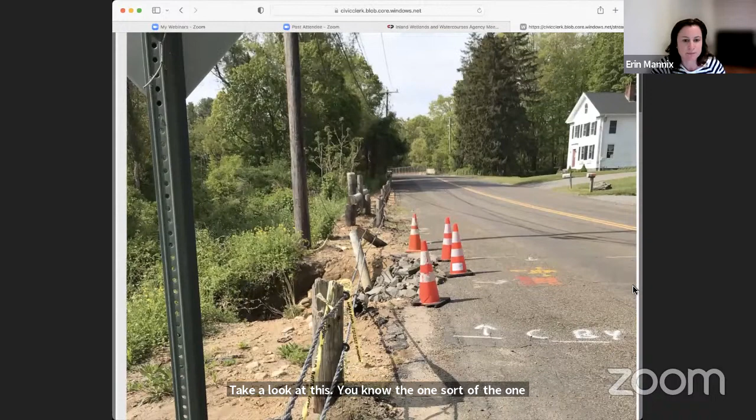Right. So you can see there, and like Erin said, we just want to get this repaired as quickly as possible. At this point, it's a bit of a road hazard, and we intend to do this with our own forces, with the Public Works Department. We've done work like this before, but I wanted to go to Erin and make sure that we're following the proper requirements. So Erin came up with this idea that would help expedite the work.

Basically, you can see in that photograph where water runs down the road, and it's probably formed a bit of a windrow along the edge and has gotten concentrated in places, which we can fix as part of this work, and let it run off as it did in the past, as sheet flow, so it doesn't concentrate in the road. But this was after a bad storm. It started eroding and only got worse in subsequent storms, I think.

And so you can see this is looking at the top of the culvert. Actually, can you show the other picture? Yeah, maybe if you can show the pipe outlet, from down in the embankment looking up. Oh, they're all on the same screen. Silly me. I'm sorry, I was looking for the second file. Here we go.

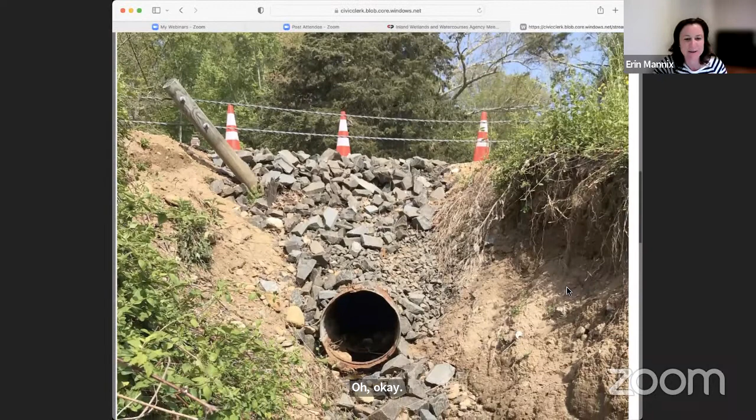Right, so this is down at the bottom of the channel. There was another 15-foot or 16-foot length of pipe section on the end of that. And after this erosion occurred, the pipe basically just collapsed down the embankment, and we hauled that out of the channel, and it's up on the upland area and the shoulder. So what we want to do is replace that pipe.

Well, let me back up. The plan here is to put a hay bale check dam type of thing, or silt fence and/or hay bales, down at the outlet of the new section of pipe that we're going to be putting in, so that if there is any wet weather, it'll trap any sedimentation that comes through. The plan is to do this work when it's dry. But definitely as a precaution, we'll put a hay bale check dam at the outlet,

and replace the fill material that has washed away and the pipe section, basically putting the outlet back where it was. And actually, this pipe is an old corrugated metal pipe that has eroded. The invert of the pipe is rusted out and needs to be replaced. So the plan here is not only to replace the end section that fell, but the entire pipe all the way back to the catch basin on the other side of the road.

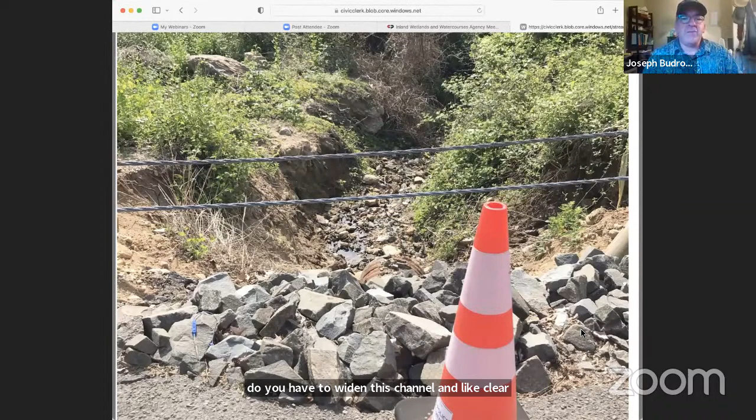Now, before you put in your fill and your stone, John, do you have to widen this channel and like clear out some of the vegetation and make it kind of sculpted before you infill? I don't anticipate it, possibly moving the riprap out of there that's fallen down. I think we'll do that so that we can dig in gravel material.

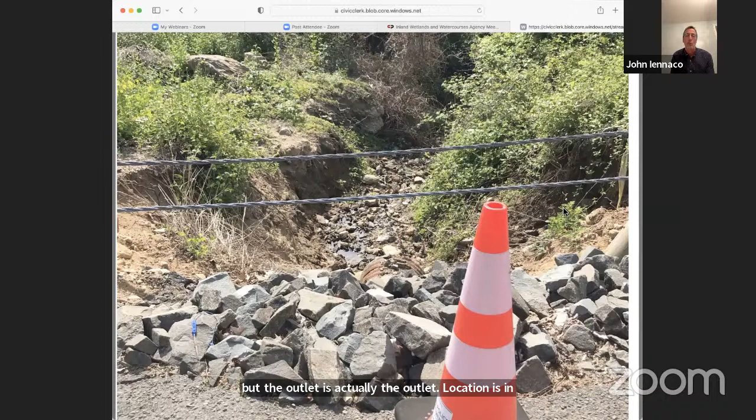But the outlet location is in the middle of that channel that you see in the background. Mhm. So it's pretty wide. There's enough room to work in there. So I wouldn't want to touch the embankment here. I don't think we have to. We actually shot the inverts of the pipe. We know exactly where it was.

And the plan is to put the pipe outlet back where it was at the same elevations, and really not change anything. But like I said, before that pipe section that had collapsed was removed, we got a good location of it. You can see sort of the dark area of the soil on the left side of the photograph. That's about where the pipe outlet was, centered in that channel.

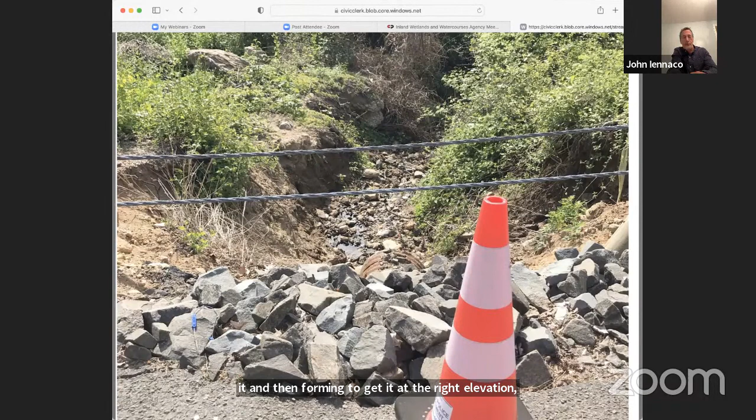So there's room to work without significant excavation, just probably cleaning it and then forming to get it at the right elevation, bringing in enough material to put the pipe back at the same elevation. But actually it's not that much material. It's like 4 or 6 inches of material below the pipe to put it back at the elevation.

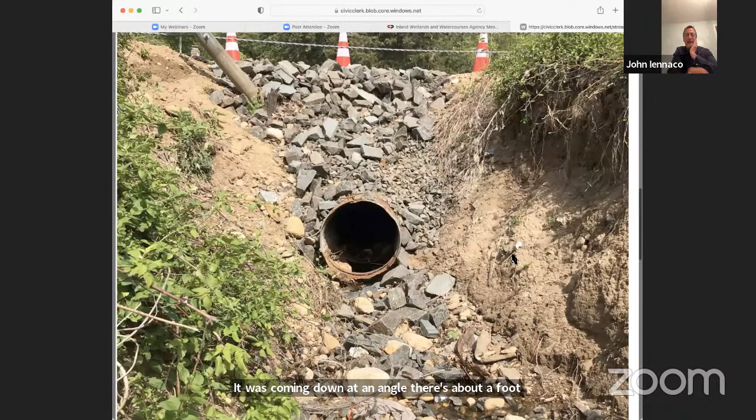If you look at the other photograph, sitting in the bottom looking up, it kind of looks like the pipe is way up in the air, but it really isn't. It was coming down at an angle. There's about a foot of drop from the inlet side to that side. And it's kind of deceiving in that picture.

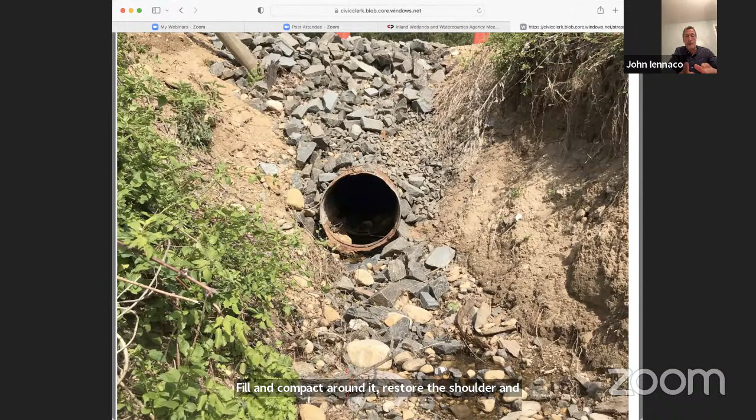The end of the new pipe is only about a foot above this stone material that you can see in the photograph. Not a foot, more like 6 inches. So not a lot of material. We'll form a bedding, put the pipe in, and then backfill and compact around it. Restore the shoulder and place riprap for some width over the top of the pipe to make sure that it's stable.

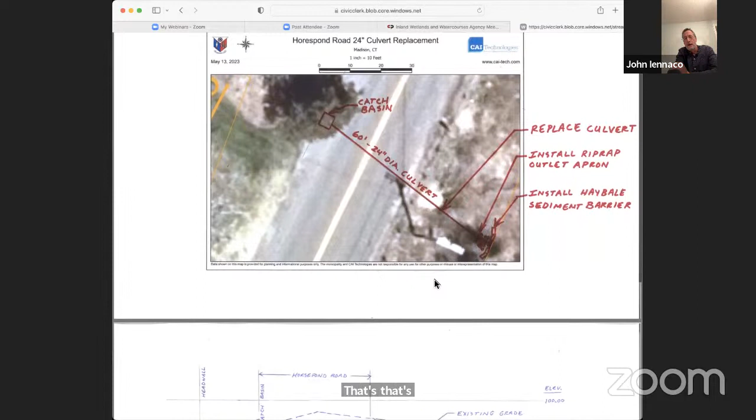We did measure everything. The profile is what we intend to do. The dashed line is what the grade looks like now. It's distorted scale, but it's to scale, just distorted. The plan is to extend that pipe. What you're looking at here is the final length of pipe where it extends beyond the embankment. And you can see that little triangular piece is the fill that's going back in the void.

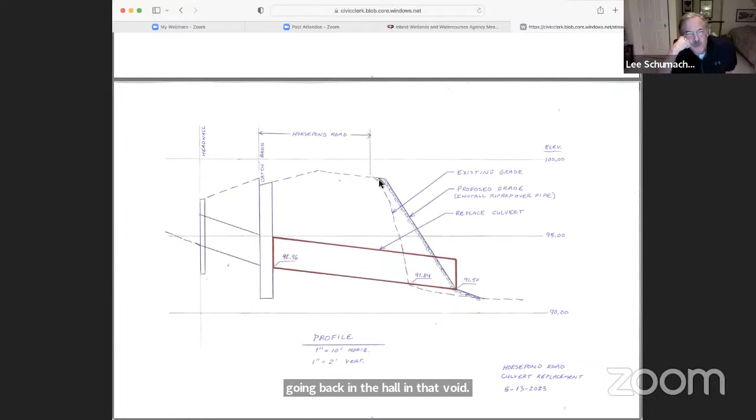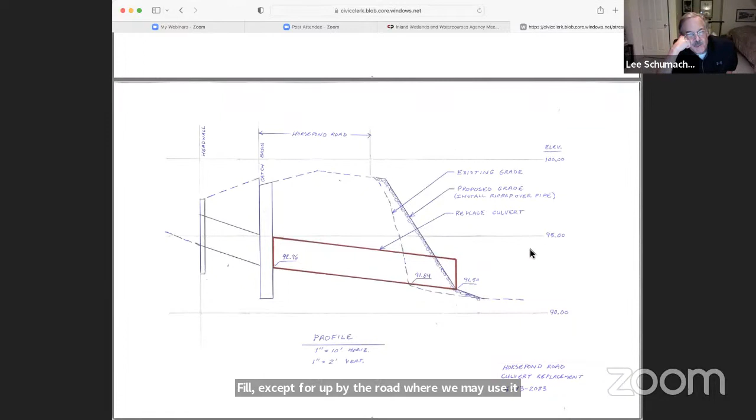This area, that's all gonna be riprap, John, I guess, right? Correct. Well, on top. That area is fill. That'll just be common fill, except for up by the road. Okay, all right, I got it. Yep. So part of the downstream end of the pipe's gonna be exposed according to this, it looks like. Yes. Okay. Right.

John, didn't you say at the site walk you were going to extend 15 feet outward with pipe? From where it was cut off? Yes. So the dashed line, and there's an invert elevation there. That's the pipe that you see in the photograph. I haven't really shown this as the sections of pipe. That's the full length. So from the dashed line, where I can't read the invert number there.

91.84. That's where the existing pipe is. The other number to the right is the elevation of where the new or final outlet end will be. And that's where the old one was. That fell off and we hauled it away. That was 15 feet. Yes, it was like 15 or 16 feet. Mhm.

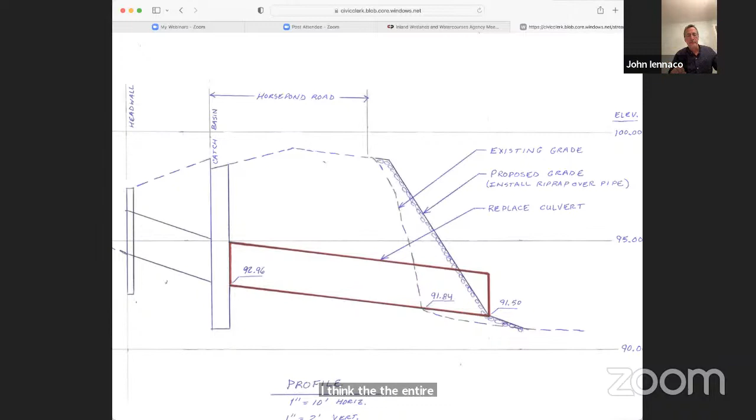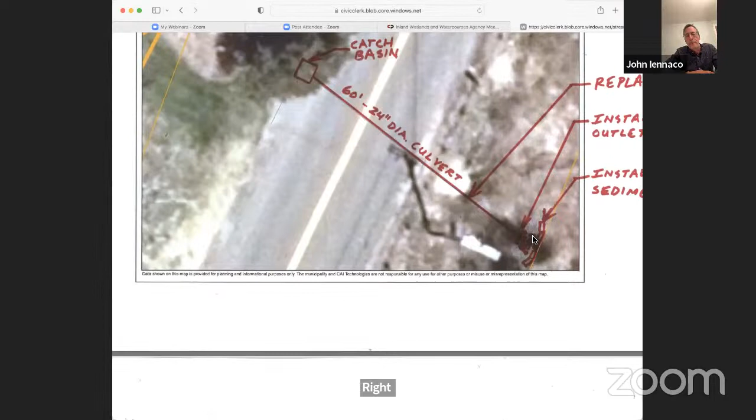I think the entire length is 60 feet from the catch basin to the outlet here. 60 feet of 24-inch diameter. Right. And you'll have some stone at the outlet here. Correct. Yeah, we'll have an energy dissipator there.

We'll form a riprap apron at the end, which is pretty much what you had before, although actually it's kind of hard to see now. I'm not sure if that was a decent riprap outlet, but that's the plan. There's room within the right of way to construct that, to dissipate the flow.

And John, remind me what you're gonna do on Horsepond Road so it doesn't happen again? So I think part of the issue here was along where that guide rail is, where you can see the guide rail in the photo. It's formed sort of a lip along the edge, and I think water traveled down the gutter further than it did probably in the past. And we can knock that down.

We can clean up the shoulder and knock that, we call it a windrow, but basically a lip along the edge. So that water will flow off as more like sheet flow and won't concentrate, to provide some assurances that it's not going to erode again. Yeah, that's something we'll keep an eye on and watch, and if we need to do something in there, we will. The other thing that has to happen in here is the guide rail needs to be replaced where it's fallen down. All right.

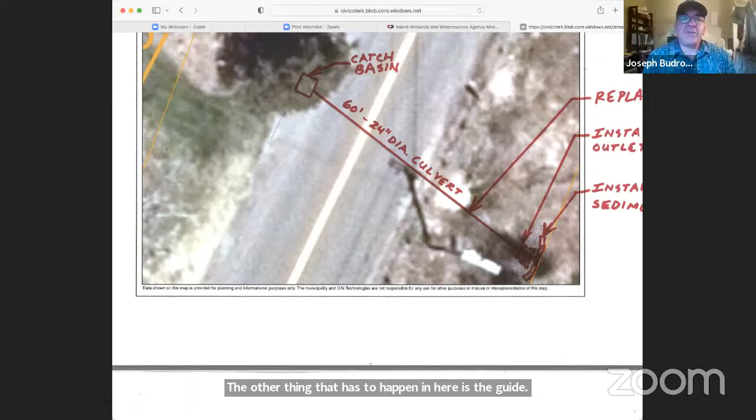Now, being a show cause hearing, Aaron, there's no need to make a motion, correct? Well, basically if the agency agrees with the order, you can uphold that order, you can amend it and give us a corrective action order. Or we could put a time frame that this be done. We clearly know that the town is looking to do this as soon as possible. And it is starting to dry out more than it was earlier this spring, so it's a better time.

I have a question. I'm curious why we wouldn't just install a catch basin on that side of the road to avoid the overland flow altogether? There's quite a length of uncurbed roadway there. Most of Horsepond Road is not curbed, so I don't think we want to change the flow regimes in there and take water that runs off in areas of sheet flow and concentrate that all into a catch basin and run it into the channel. I thought about that, actually, but I think it's better off to put it back where it was.

I'd rather not change things, redirect flow around. Generally my opinion is you want to avoid that as much as possible. Seems like it wants to go here, though. This is the low spot over that pipe. I don't know if that's a low point in the road, if that's a sag in the road, actually. It's a good question. I don't know if that is. It probably is. Because that's where it's going to happen again at some point, you know?

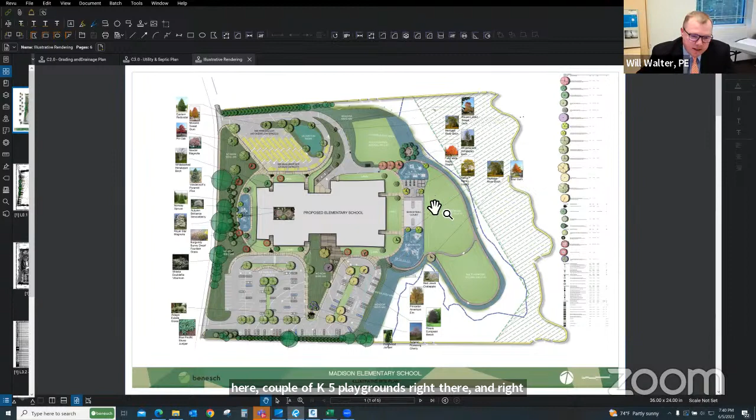So as far as placemaking spaces, we have some outdoor spaces down here. We have 3 playgrounds, a pre-K playground up front, up here, a couple of K5 playgrounds right there and right there. And they sandwich a basketball court with some other hardscape areas for Foursquare and things like that. We have down here in the floodplains, which I'll talk about in a little bit, a couple of multi-purpose natural grass fields.

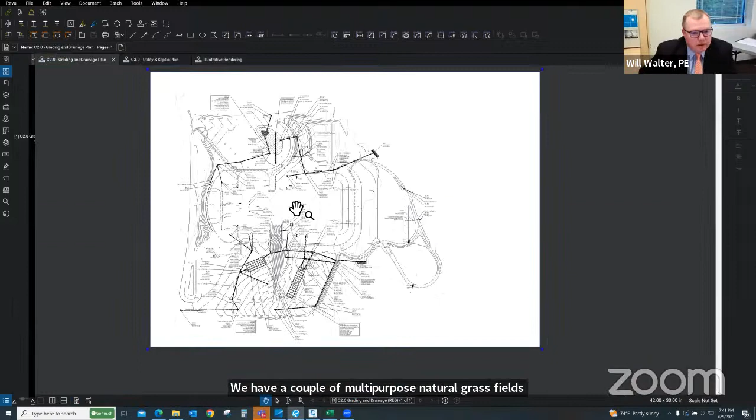So moving on to the stormwater design. Excuse me, I'm battling some allergies here.

The green is the wetlands. The cyan, which is the hatched cyan area, is the upland review area, which is about 2.3 acres of disturbance in the upland review area. The red here is the 500-year floodplain. So there's a lot going on this site, and when you're out at the site, it looks like you have a lot of land to work with. And while you do, there's so much going on that, I want to say it's been a challenge, but it's a challenge in every project to fit the program in and meet all the regulatory requirements.

So the first thing, obviously, is the green line is the wetlands. We've worked very hard to keep completely out of the wetlands. We're not disturbing 1 square foot of wetlands. This floodplain line right here follows the contour, and keep in mind, we've done all this design in coordination with the town engineer.

But in this 500-year floodplain, not only do we have to have 0 total fill to the east of this red line down here, but we have to have 0 fill per each foot of elevation rise as we start from the wetlands. Each foot we go up. So it's not a matter of just 0 compensatory total, it's every foot. And we have to keep that finished floor elevation at 2 feet above the 500-year floodplain.

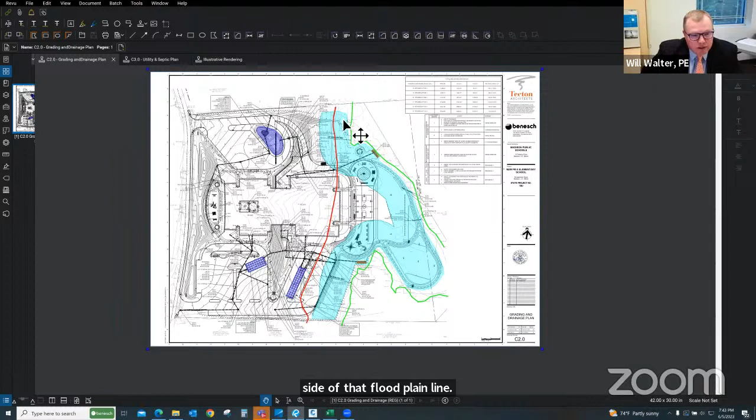So if you can imagine, here's the building line right here. It's on the east side, on the floodplain side of that floodplain line. So we have to do some filling in here. So we've really had to work very hard to grade this so that we were not filling in the floodplain. And then also, having put one of the multi-use fields right here, we want to raise that up as much as possible so the kids aren't playing in a swamp. So there's a lot of things going on that we've had to work really hard to do.

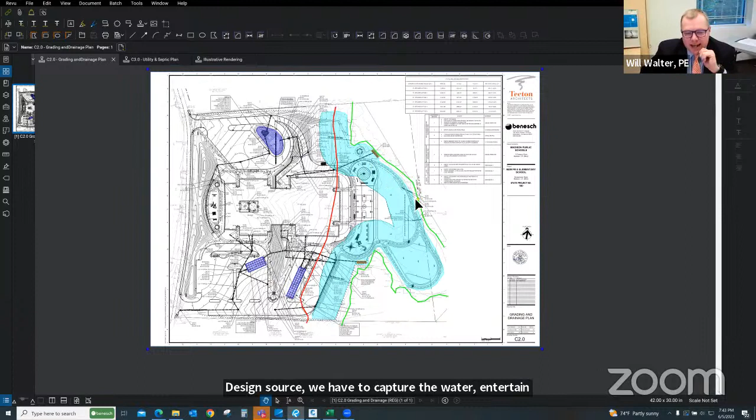But there's really 3 goals with the stormwater design. One is whatever is naturally flowing down over the grasslands right now into the wetlands, whatever the peak flows are through the design storms, we have to capture the water and detain it and regulate it and then discharge it at a lower peak rate for the 2, 10, 25, and 100-year design storms. We're doing that by capturing the flow in all of these impervious areas, including the roof, and we're discharging it to 3 stormwater management areas.

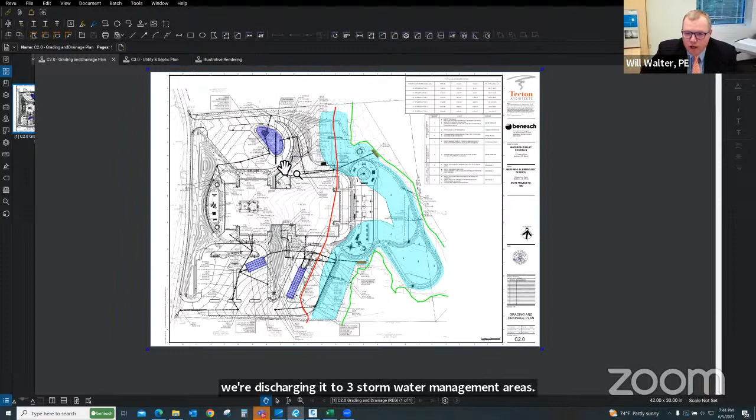The first one is on the north side. It's an above ground basin, which we always prefer to go above ground when we can. And we had the ability to do it over here. And the above ground basin is basically going to be a depression that's in the middle of the grass island, around the parking and the drive aisle.

On the south side, we just simply didn't have the topography or the room to go above ground. So we've gone with 2 underground detention systems, and you can see I've highlighted them here in blue. I believe they're 4.5 or 5 foot half moon chambers that are open so that the stormwater flows in. They're sitting on about a foot of stone. The water comes in and it percolates in the ground, which is fantastic because the first flush is treated by discharging back to the ground.

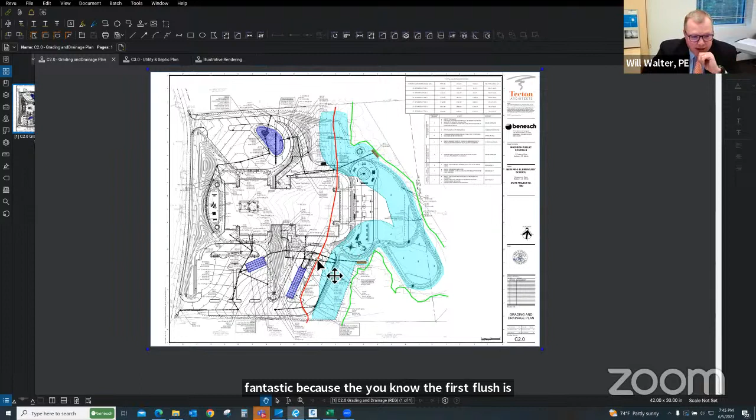And then for the smaller storms, the majority of the flows are going to be infiltrating to the ground. And for the larger storms, as they perk up through that stone, as they bubble up through that chamber, we have overflow pipes, which then discharge the flow to two areas. And we've designed this specifically in coordination with the town engineer.

So the flow comes out of here and it comes down to one of these two, what we call overflow level spreaders. There's one right here and there's another one down here. So the water comes in, and these things are basically a concrete chamber where the pipe comes in. It's a concrete trench. The pipe comes in, it tees to a perforated horizontal 24-inch pipe that's surrounded by stone in the trench. The water then bubbles up and sheet flows over the concrete and riprap level spreader.

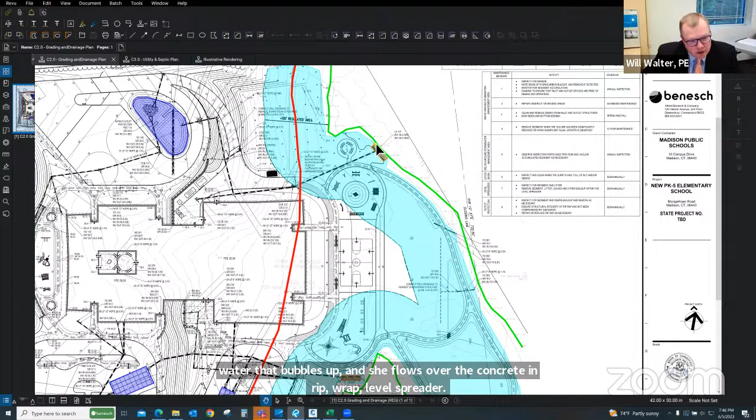So instead of point discharging to the wetlands, it sheet flows. You can see it's sheet flowing like this over here, and it's doing the same thing, sheet flowing over here. That's a design I've used many times. It's a really good design, and the town engineer really liked it. So that's how we're regulating the discharge to the wetlands that eventually gets down to the Neck River and not causing washout.

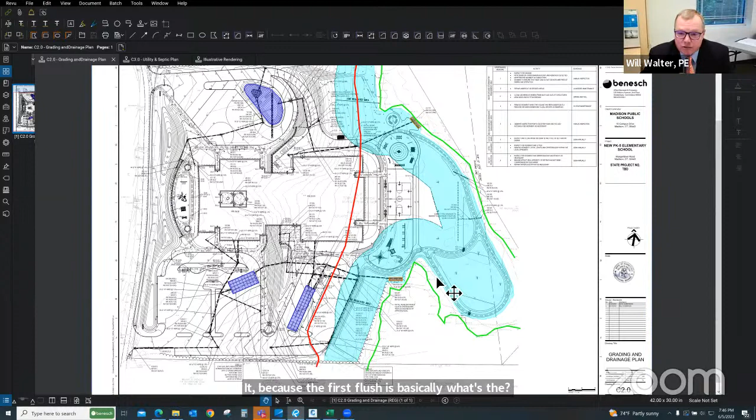The other goal of the stormwater management system is to take that first flush and to treat it, because the first flush is basically the first inch of rainfall. The pollutants you find on the paved surfaces are a result of car exhaust, the heavy metals coming out of the exhaust, occasionally oil drippings, things like that. And the thought in the regulations that DEP has put forth, that we all adhere to and design to, is that first inch of rainfall is what carries away the sediment that's holding on to these pollutants.

And so what we've done is, as we capture it, we come into what's called a sediment forebay that basically treats that, and then it spills over and gets into the larger part of the detention. And from there it spills out and goes to the wetland. And then these underground systems are designed with what's called an isolator row that's really performing that same function as a sediment forebay. And so we've designed the water quality to meet the DEP requirements.

I just got an email today from the town engineer on his review of the stormwater management system, and he had a couple of very, very minor comments, which we will certainly address. But basically, it looked like he had accepted our design part and parcel. So that's the other part of the stormwater design.

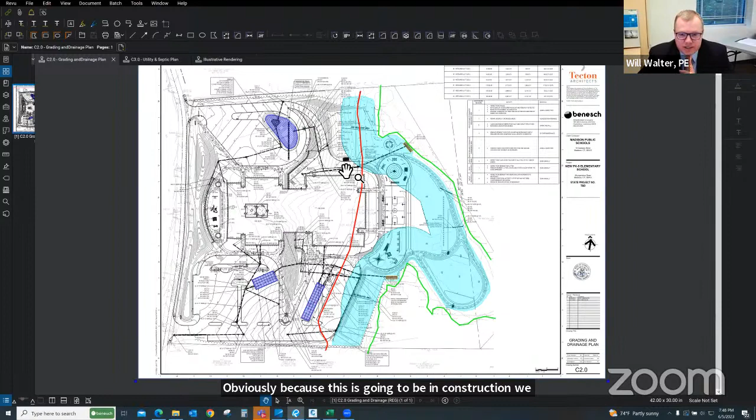The third part is, I'm not showing it here, but it's defined in our erosion control plans, that we've provided a very comprehensive erosion control design so that during construction, we're going to make sure that all the stormwater is treated, because it's going to be muddy, obviously, during construction. We have things like construction entrances, temporary sediment traps, silt fence, hay bales, temporary washout areas, things of that nature. So the sediment controls have been designed per the 2000 DEP erosion control manual. I'm not showing it here, but that is a part of the plan set.

And the last thing that I would like to talk about before I turn it over to George Logan, and he'll talk about his inventory of the wetlands and his review of our stormwater design, which we did in concert with George as well, and then his opinion of the impact on the functions and values of the wetlands. The last thing I want to talk about is the utilities on the site.

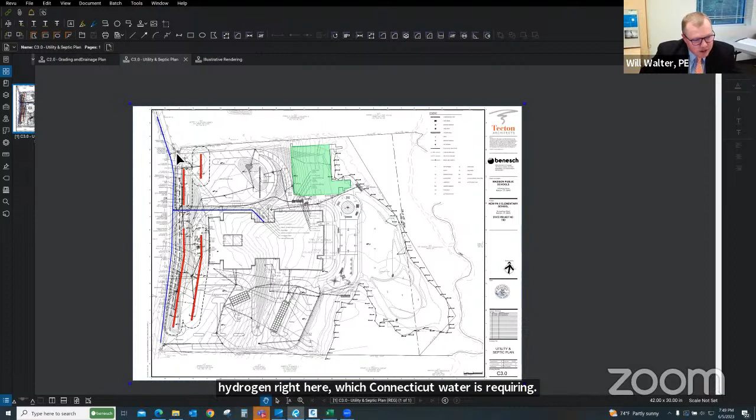So currently there is no public water. We're extending the public main about half a mile up from Green Hill Road, which is way up this way. There's going to be a 12-inch water main extension that runs all the way down like this. We're taking it past here actually because the fire marshal is requiring us to put a fire hydrant right here, which Connecticut Water is requiring be right off their main. So there's going to be a fire hydrant right here, a fire hydrant up here. We're bringing in a domestic and a fire protection lateral like this into the building.

There is no natural gas, but you can see I've highlighted in green. We're going to be providing a geothermal well field, which is fantastic. It's green, it's awesome.

So that's going to help power the facility right here. And then the last thing I want to talk about is the septic system. Typically, what you do with the septic system is you would put it down gradient of the facility. We could, I believe, by regulation, actually probably put that septic system down here in this open space, down close to the wetlands.

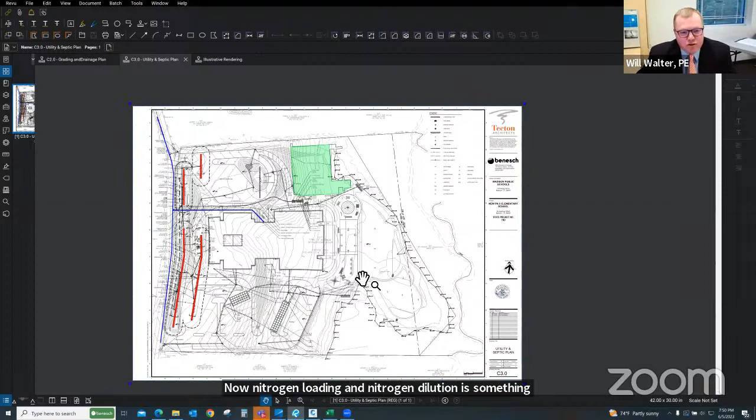But it was very important to the building committee that we designed it with consideration for nitrogen loading. Now, nitrogen loading and nitrogen dilution is something that DEP requires when you have a DEP system, and that's triggered when your total flow is 7,500 gallons or more. In this case, our total flow is somewhere around 7,200 gallons a day, which means that the reviewing authorities are the Madison Health Department and the Connecticut Department of Public Health. Connecticut DEP has no jurisdiction over this design.

But what we've done is, instead of putting it down here where I believe we could get it permitted by the local health department and by DPH, we are coming out and we are pumping it up this way. And I've laid this out. It's the red lines that you see. These are proprietary leaching systems that we're using, which are very, very effective at treating the septic. So we're going to pump it up, 3 separate pumps, 3 separate systems pumped into these red leaching units out here.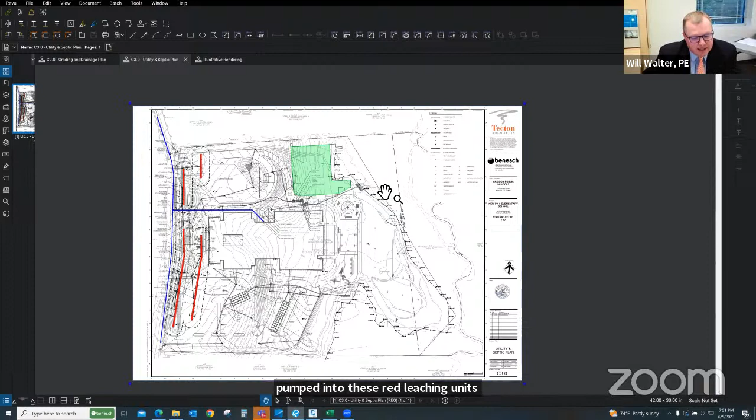These are located anywhere between 400 and 650 linear feet from the wetlands, and much further than that from the river. So the water is going to get pumped up here, then it's going to gravity into these leaching systems. It's going to percolate vertically down through the soils. We've done all the tests, and then it's going to slowly migrate underground, slowly down like this towards the wetlands.

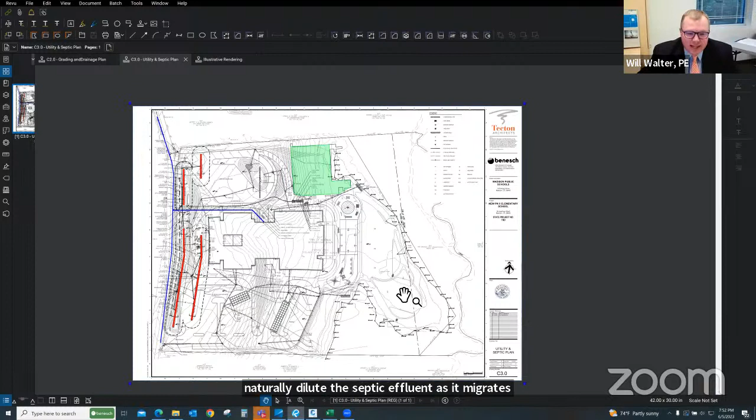We've also designed the stormwater system such that the stormwater, after it rains, is going to be in this system. We have some linear units here, here, and here, and elsewhere that are going to naturally dilute the septic effluent as it migrates down here to the wetlands. Now, keep in mind, none of this is required by Madison Public Health or the Department of Public Health. We're doing this just as an extra measure so that the Wetlands Commission and the Building Committee can feel great that this septic system is not going to impact the wetlands. And that's exactly what we've done.

So right now, the Madison Health Department has completed their review. The review has been ongoing by both the Madison Health Department and the Department of Public Health, but the Madison Health Department has completed their review, and now the Department of Public Health has had it for probably about a week and a half or 2 weeks. But they've been informed of this design the whole time. So I'm hoping to get comments back from them in the next 2 or 3 weeks. And then, of course, we'll respond to their comments as we need to.

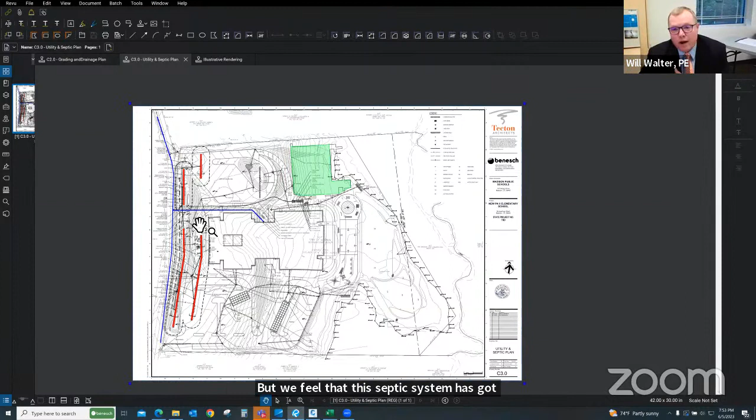But we feel that this septic system has gone significantly above and beyond what is required, again, by the local and state health departments. And so at this point, I'm going to stop sharing my screen, and I'm going to turn it over to George Logan, who's our soil scientist on the project.

Good evening, everyone. George Logan here for the record, professional wetland scientist, registered soil scientist, senior ecologist with the Ecological Society of America.

So one thing that I probably need to ask before I proceed is if I can share my screen. So if I can, sure. I guess. Yes. Well, okay. So here we are. I don't know if you folks can see. Hold on a second here. Maybe, okay. I got a lot of overlapping things here, so I need to figure, all right. Can you see that? Yes, affirmative? Yes, perfect. Okay, great. All right.

So I'll try to go, I wouldn't say fast, but I just want to give you an overview of what I've done so far. My involvement goes back to the summer of 2022, when I was contacted, and the first order of business, as usual, was to delineate the wetlands. So in mid-August or so, I went out, and the delineation is pretty straightforward. Most of the wetlands are within the wooded portion of the site, because the rest of it has obviously been used as active agriculture, with a long history of being an open field.

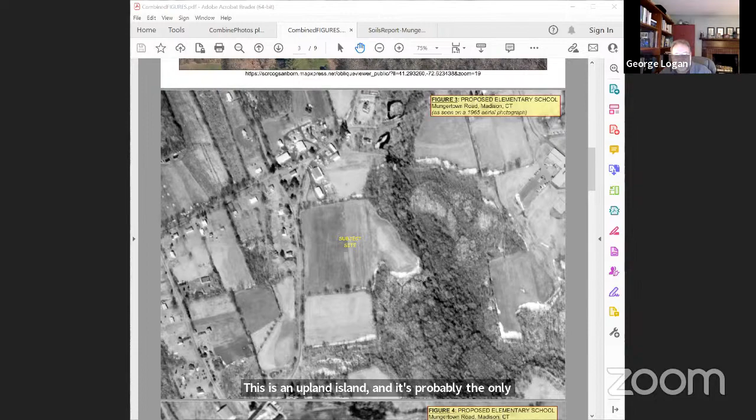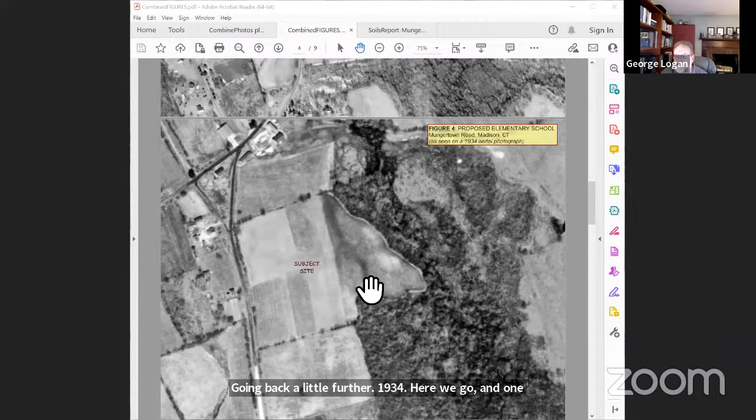Going back a little further, 1934, here we go. And one of the things that's interesting about this, you probably say, well, what's this white line that's following the edge of the woods? And what that is is a very low berm that was constructed probably by the farming activities. I don't think it was done on purpose. And it kind of shows pretty nicely in this particular aerial photograph.

Here's the watershed. This is figure 5 in my report. I was able to grab that from USGS StreamStats, which is one of the applications that we use to kind of tell us where things are, and lo and behold, it allows you to take it out as a KMZ file and then plop it on Google Earth, which is wonderful. And so that gives you an idea of the watershed.

And if you look carefully down in the bottom here where the hand is, that's the site. It's very small in comparison. That will come into discussion a little later when we talk a little bit about the septic system. Here's a figure without a label. So I lost the label. So if this was figure 5, this must be figure 6. And what I've done here through the Connecticut ECO GIS system is I've overlaid various resources. You can see some green shading in there.

You can see some pink, mauve, purple, and all combined, that shows you where, at least from the GIS system, your contiguous wetlands are associated with the wetlands of the site. And believe me, it's actually larger than that.

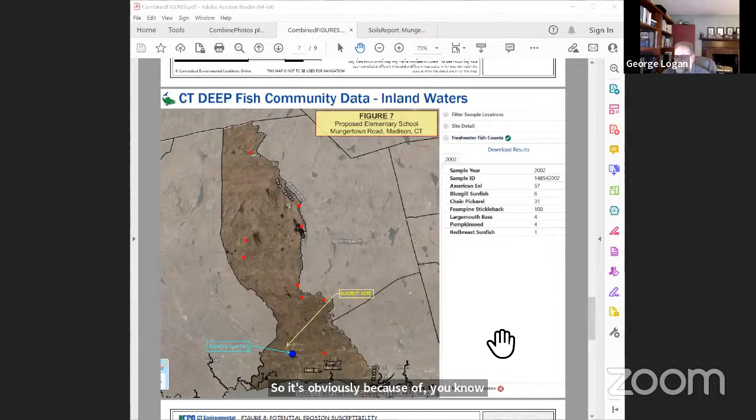Wetland characterization. Let's see if I can go here, give you a little bit of an idea of what we have. Now you can see the topography, and this is 1 foot topography, care of Connecticut DEEP GIS. I'm calling this wetland A2 because it's sort of more separated from the riparian portion of this large wetland. This has a little different character to it. Obviously, it will flood up, and you saw the flood line earlier from Will. But this is more of your typical red maple swamp, whereas if you go in here, it's a whole bunch of different things, which I'll explain in a moment.

So wetland A again has two components, and here's this little portion that juts out into the field. It's a little wet meadow, and I'll show you some photographs too. So again, seasonally flooded, seasonally saturated, temporarily flooded when the river overflows. There's some areas that are permanently saturated, and here it's quite wet. The further you go away from the property, or maybe at the edges of the property, that's the case. So this is a palustrine forested wetland by National Wetlands Inventory Classification.

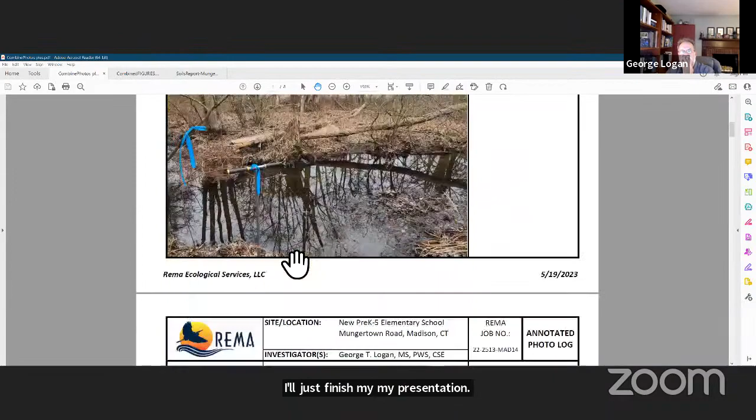So again, I'll show you a few pictures, and then I'll just finish my presentation. Some of those pictures are kind of grainy. This is from Neck River. It's quite nice. This is a fox grape tangle, and here you got good vegetation, good vegetation along the river. I did see some cardinal flower, which was very exciting. Whenever I see it, it's beautiful.

This was in February, the 22nd. I've crossed the side channel, which was not flowing much, was flowing a little bit, and I'm looking back into the field.

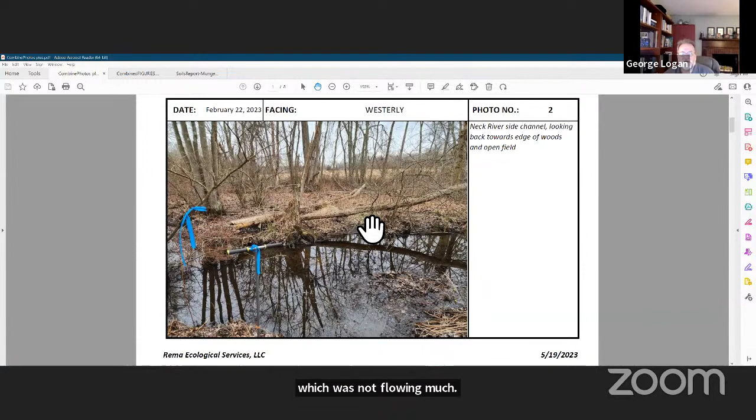And so that's all for now. So I guess my conclusion is that there are no direct impacts and the indirect impacts are really minimal. And so I believe that these wetlands will continue to function at similar levels as they function under existing conditions when and if the school is built. And I will end my presentation with that. Thank you.

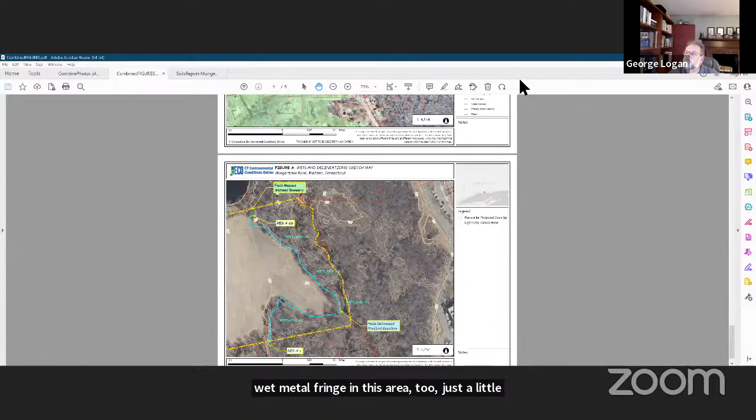Ma'am, is there anyone else on the team speaking tonight? No, I don't think so. I should have introduced Bill McMahon. I apologize, Bill. Longtime resident, Board of Education facility support. So I'm remiss in not pointing Bill out, but that basically concludes our presentation for tonight. I know you're going to hold the hearing open, but we're available to answer any questions that you might have.

Okay, there definitely was a lot to digest. Anyone on the commission with questions? I have a couple questions, Joe. Okay. A couple for Will. I was wondering what the depth is to groundwater in the western end of the site where the septic leaching fields are going to go. Yeah, let me share my screen.

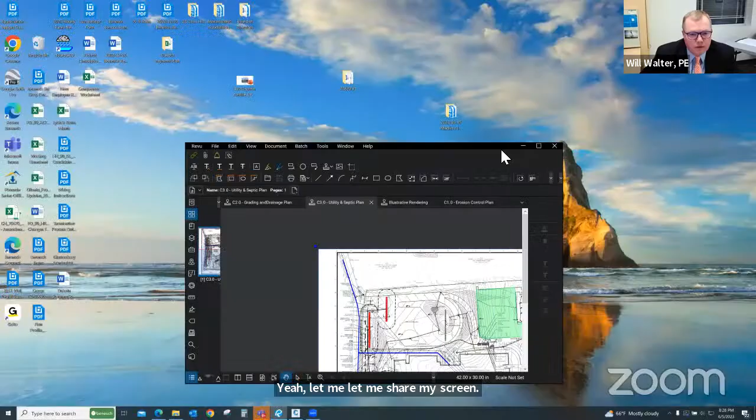So it was interesting, Matt. Of course, we did test pits with DPH in attendance and the health department in attendance over all these areas. And over here, it's a little more restrictive, generally speaking. In fact, there's actually a little bit of, it's not an outcropping of ledge because it doesn't come out of the ground, but ledge or hard pan comes up to like 2.5 feet below the ground. So you can see we're not continuing our septic system through here.

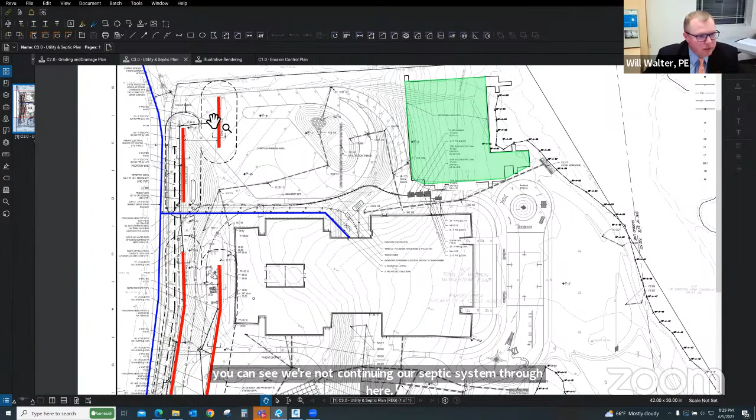Generally speaking, the soils up here are a little more restrictive. And over here in this entire area and all the way down, groundwater was down pretty deep. There was no hard pan. Seasonal high in some cases was down like 3.5 feet, 4.5 feet, something like that. And we designed our septic system based upon the most restrictive results that we got. So it's actually a very conservative design, but it does vary. It seemed like it was a little more restrictive up here than it was over here.

Okay. Thanks. Another question is, did you folks, and I apologize, I haven't looked at the hydrologic study, did you develop a sub-watershed map for pre-development and post-development? Yes, in fact, that was an interesting conversation that we had with the town engineer. And what we had first talked about was the fact that we really don't need to detain anything, because if you think about it, we've got a massive river coming down here with thousands of CFS.

And, you know, if we increase a little bit, a few CFS, it's not going to impact the system. And he agreed with that. But what he said, he was worried about creating erosion problems if we didn't detain the peak. So essentially, we've matched our 2, 10, 25, and 100-year storm, probably within about 5%, all just barely below existing, which is great because as George had said, we're basically mimicking to the maximum extent practical existing conditions.

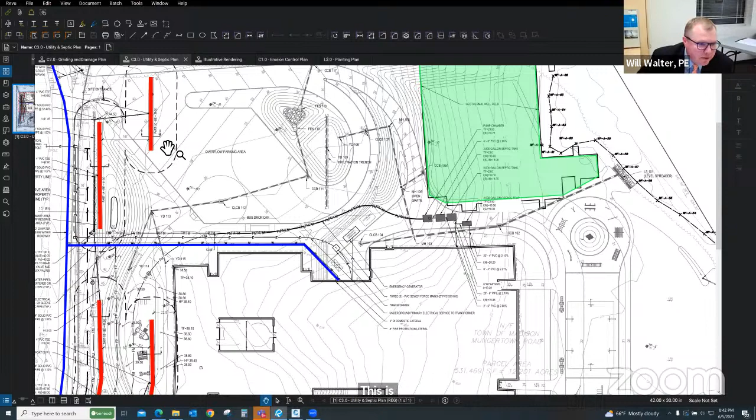No, I mean, we tried to spread out, Matt, the system as much as possible to help dilute that nitrogen. And you can see here, this is probably 200 feet down from here. So I think I have to go back and look at the elevations, but no, we weren't concerned with that. In fact, what we wanted to do was get some infiltration happening in these basins as the effluent slowly migrated down below it.

And then my other question was the level spreader for that basin, that outlets right next to the wetland there. Do you know offhand what storm events that would discharge at? Is that like at a 1 year? Is it at a 10-year? You mean when water starts flowing out of there? Yeah. It will be at the 2 year for sure.

Okay. If you put that in your report and you want me to, I can tell you exactly. I don't have it off the top of my head, but I suspect the water quality volume is going to be 100% infiltrated. And then at some point between that and the 2 year, we'll see discharge coming out of here and coming out of here.

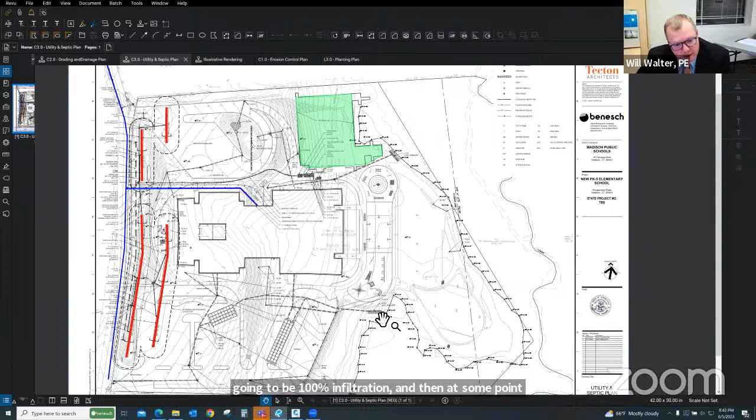Okay. Yeah, that's it for me, Aaron. I'll digest this and I'll speak with Eric and we'll get something on paper. But I appreciate the presentation. It's very helpful. Thanks.

This is a question to follow up on that. Will, is that detention basin in that parking area a wet bottom? In other words, does it intersect groundwater? No, that's above groundwater. Okay. So it's specifically designed to be above groundwater. Yep. Okay. Thank you.

It sounds like the commission and Matt have asked all their questions for tonight, Aaron. So does it look like we have a lot of people out there? I don't believe we have a lot of folks from the public. I anticipate most of them would be at our Planning and Zoning Commission hearing for matters related more to their jurisdiction. But yes, we can open it up if anybody is interested in making comments from the public, either for or against the application. Please just raise your hand and we will enable you to speak.

Okay, I don't see any people, okay, there are none. So at this time, this is last call for anyone in the public to have questions or comments for the applicant or to state an opinion with regards to the impact on the wetlands, for this meeting at least. Yes. I'm sensing there's no commentary out there. So I think at this time, if the commission's comfortable, I'd like to entertain a motion to continue.

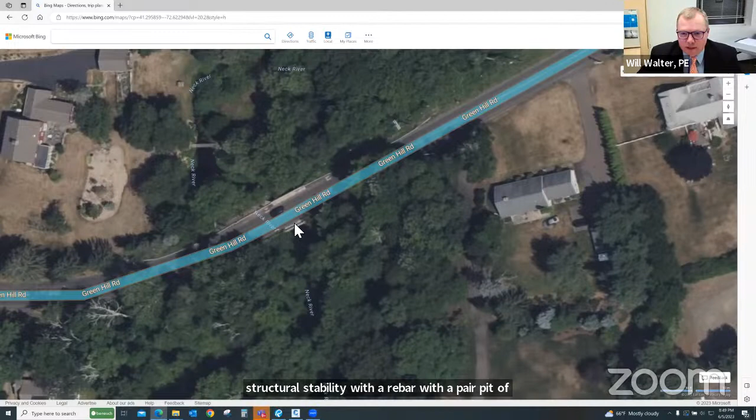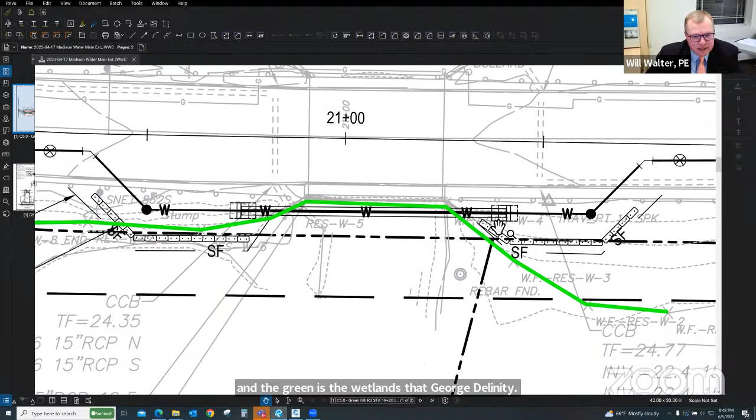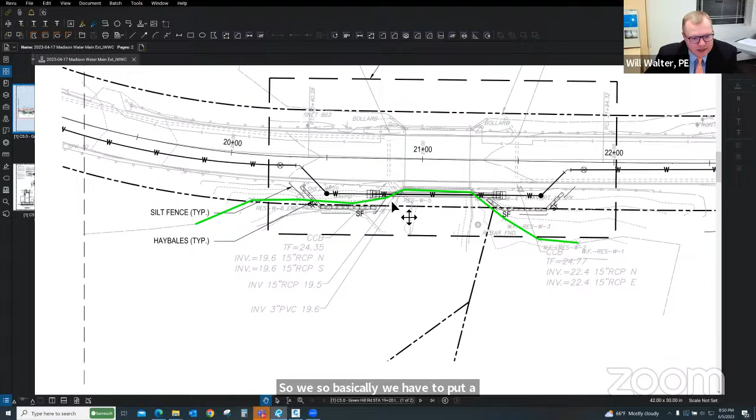What we have to do is, and I'm zooming right in on this, we're coming underneath the road with the water. Before the bridge, we pop out of the side, and then we have a concrete pier on this side of the bridge and on this side of the bridge, and we span with our water pipe. So we're not attaching it to the parapet. So basically we have to put a concrete pier, which is 8 inches by 8 inches, on either side. So there's very little disturbance, and the disturbance is completely out of the wetlands on both sides. And the water pipe is overhanging, so it's not going through the wetlands.

So there's, again, not 1 square foot of disturbance of wetlands, but we are doing a very minimal amount of disturbance in the upland review area. And that's why we're here, obviously. And that's why this is not a public hearing; Erin's determined this is not qualified for a public hearing. So again, I don't want to say it's a simple design because it's not simple from a structural and a water point of view, but in terms of construction in the upland review area, it's very, very minimal.

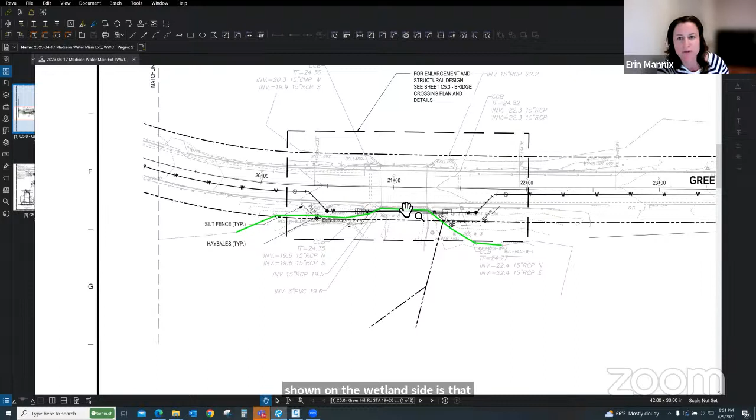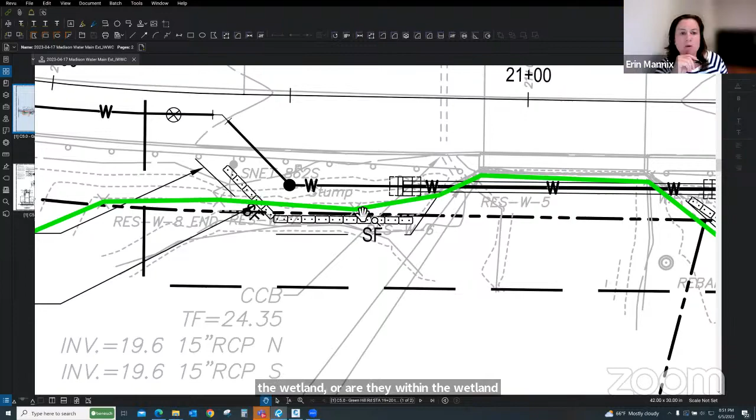Will, can I ask you, this drawing where you have the green line, that was one of my questions. Your erosion controls are shown on the wetlands side. And it was hard to see where the delineation was on this plan. Are the erosion controls upland of the wetland, or are they within the wetland? No, I noticed that as well, Erin, and we mistakenly placed them on the wetland side. We can certainly pull them up here, and we will do that. We'll get them out of the wetlands.

And as far as excavation, how far down is there a need when you're excavating to dewater at all during that? Can you walk us through the construction sequence, so that we understand what that looks like? Yep. So the first thing they'll do is set their silt fence and hay bales, and I've got a row of each just to be safe. We'll pull this up so it's right down here, and then they're going to have to sit off to the side, possibly sit on the road, and then excavate.

And I believe they're going to go down below frost, which is 3.5 feet. So they're going to have to go down below that. If dewatering is required, then dewatering will be provided, and we'll provide a hay bale dewatering station, so that whatever is dewatered will get pumped out to like here, or possibly out to here, and they'll be surrounded with hay bales. So whatever gets pumped out will get filtered before it flows back into the wetlands.

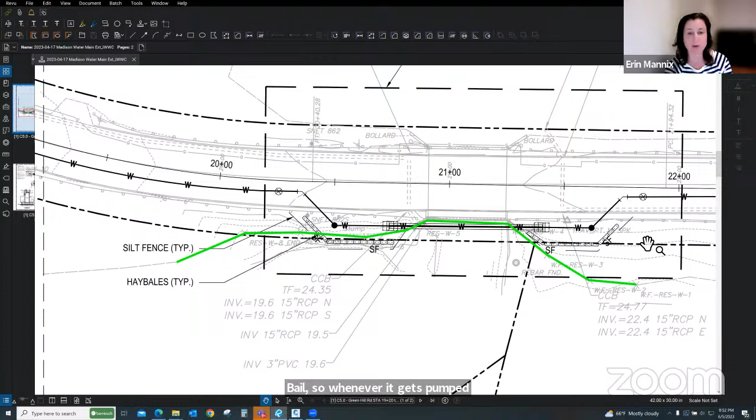Okay. And I think this might be my last question. Has the water company approved this plan as the design? They've reviewed this? Yes. Yep. The full design is approved by Connecticut Water Company. Okay, good. Does the agency have any questions about this proposal?

How big is the water line currently there? Or is this a brand new water line going right to the school? This is a brand new water line, half-mile brand new water line, 12-inch diameter. And are the public homes going to be attached, or is this just for the school? Well, they certainly could be. It's not the school's responsibility to attach every hookup, but absolutely it will be available for anybody along there. Okay, yep. And the only impact to the ground are the abutments. That's correct. Okay. Anybody else?

Okay, sensing no questions. I did have a draft resolution for your consideration. Oh, yes, you did. They came kind of late in the day. I didn't get to print them. Sorry about that. It was one of those days. No, I get it. Okay. I can screen share that for you.

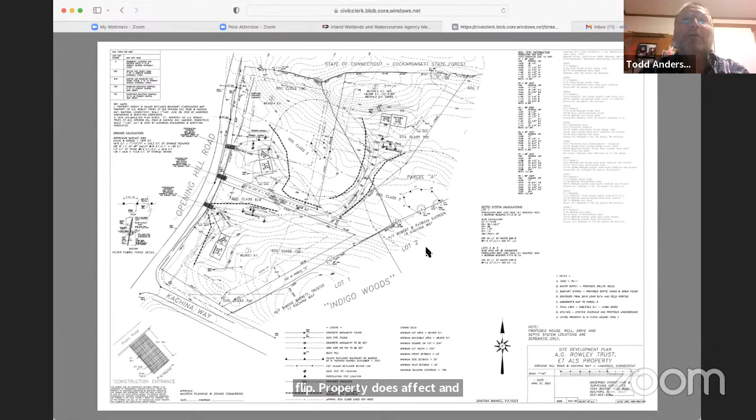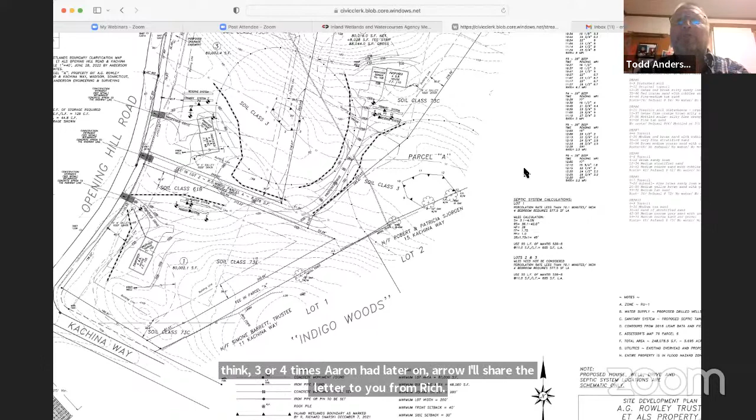There is a small depression in the middle of their land that is a potential vernal pool. Rich Snarski, who marked the wetlands, was out there I think 3 or 4 times. Erin will share the letter to you from Rich. I think he was out there once last year and at least 2 or 3 times this year, checking on that vernal pool to see whether there were any obligate species in that pool. He did not find any.

On the wetlands walk, one of the commission members did find tadpoles for wood frogs in that pool. It was extremely small at the time, but there were tadpoles. So we're trying to protect that as much as possible, in the event that any obligate species may or will in the future inhabit that pool, which Rich says does not hold water very long because of the porosity of the soil underneath it. We have very good soils in that area.

As you can see from the test pit results, we have beautiful sand and gravel. We have less than 5-minute perc rates throughout the site. And that pool basically happens because it's a low area. It's got a leaf mass on the surface that holds water, but from what Rich said, it doesn't hold water long enough for the obligate species to be attracted to it.

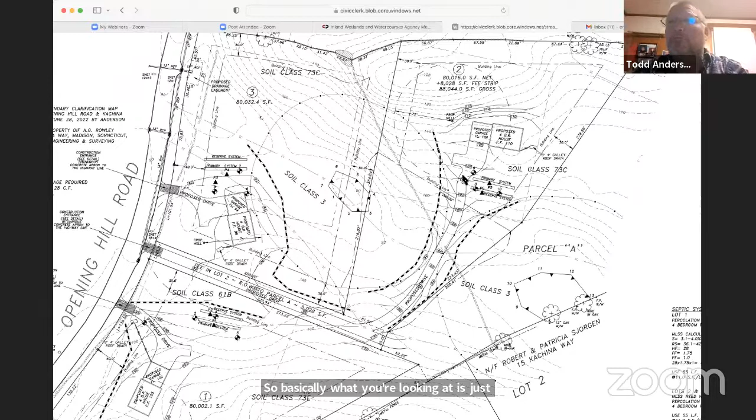So basically what you're looking at is just driveway and grading within your 100-foot review zone. So we feel it's the minimal amount of impact on the wetlands as was marked out. And it's the best way to develop the property that fits zoning. And I hope for your approval. So I'm open for any questions.

Obviously, like we always say, lots 3 and 2 potentially will be back in front of us. But... Oh, those two will absolutely have to be back in front of you. Okay, these are theoretical locations, and we placed houses in our recommendations of where we feel we could build a house. But of course, when somebody buys the lot, they come back in with something different. So yes, lots 2 and 3 will absolutely be back before you. Lot 1 is outside of the 100-foot review. That one you will not see again.

So I know Lee was on the site walk with Erin and Kia and myself. So just wanted to tell Anna and Martin that the first wetland there where it says soil class 3, very shallow, there was just a little puddle dead center, and Kia jumped right in there and found some tadpoles. And the wetland under parcel A could be spring fed because there was some rippling going on and movement, but that was unconfirmed. And also very, very shallow. I just wanted to visually describe what they looked like.

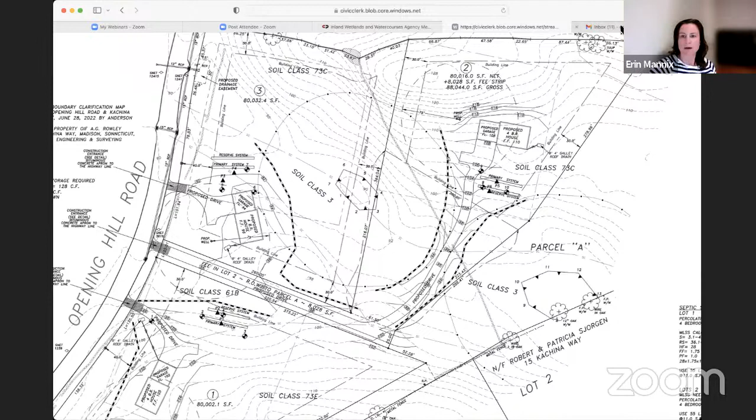And I can share, did you see that switch? Yes. Okay, good. This is Rich Snarski's letter, and I apologize that that was not attached to the agenda. That was just an administrative error on my end. But yes, as Rich Snarski indicated, he was out to the site 4 times, for the initial delineation on December 7th, 2021, and then again on March 31st, April 5th, and April 7th, 2023. I'm happy to read it out loud, but I don't think I need to. No, as long as you can all see it. He didn't see anything. What was the date of our site walk when Kayla found the tadpoles? May 13th. Okay, a little later.

And so it looks like there are a couple of trees near the pool. Is it mostly open around that area? Oh, it was wooded with some fallen trees across each wetland area. Definitely the first one, there were fallen trees, and I think I asked at the walk that there's no intent to remove the fallen trees. Mm-hmm. It was wooded. I mean, the whole site was wooded.

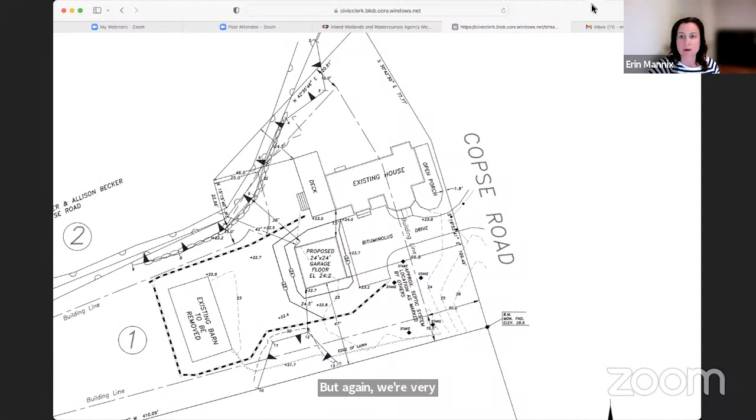Kieran, I can share your survey, your plan. Please do. Thank you. And then we can kind of walk through it and talk through any of the feedback from viewing this on the site walk. Yes, thank you. See that now?

So you can see our existing house, our driveway, where the proposed garage will be, just north of the driveway, about 4 feet off the existing driveway. The existing barn in the back will be demolished. Certainly within the setbacks, obviously within proximity to the wetlands. So that's why we're in front of you guys tonight. Again, I'm just a homeowner. I'm not a builder. I'm not an engineer. You guys came out and did a site walk, so we're just looking to hopefully get approval for this pretty straightforward proposal right off our driveway where the garage is going to be built.

No grading is going to need to be done. It's basically going to be a slab on grade right off our existing driveway. The barn in the back is going to be removed. It's 1,300 square foot. The garage is 576 square feet. So, a much smaller structure that we're proposing. Anderson Brothers is going to do the demo on the barn. There's no grading going to need to be done. They're saying 10 to 12 cubic yards of just topsoil to basically make that area grass, which right up to the barn and behind the barn is existing grass. So not a lot of site work that's going to need to be done.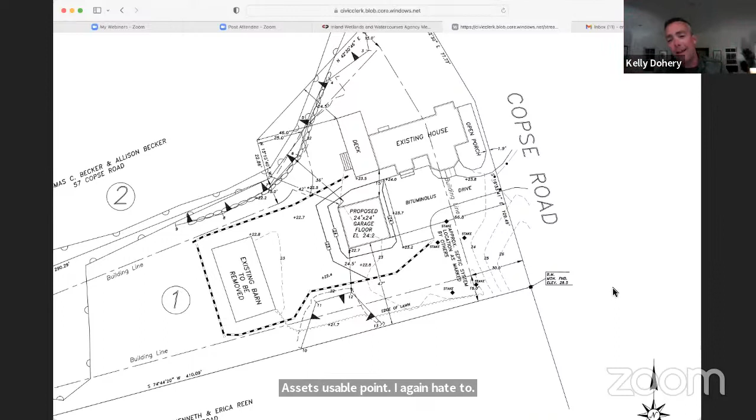Yeah. Not wetland related, but you're going to keep that big thing that's on top? Well, so I was talking to Erin. Funny enough, the new garage we're building, we're going to have a cupola. We have a black lab. We're going to have a black lab weather vane on top. The weather vane that's on the existing barn, our neighbor Allison Becker to our north, her late husband put that on her barn. We're going to take that off and give that back to her. Very nice. That's a special piece right there. Was it for a dog? I think it's a pointer. Yep. That was one of their old dogs. So yeah, we're gonna give that back to Allison.

All right. So, Erin, that wetland to the south, was that on the original site plan, delineated? Yes, this is the plan that was received with the application. So yes, this was available prior to the walk. Okay. I just didn't remember if we needed them to go restake that area. No, it's been staked, flagged in the field, yep, which was what caused the question.

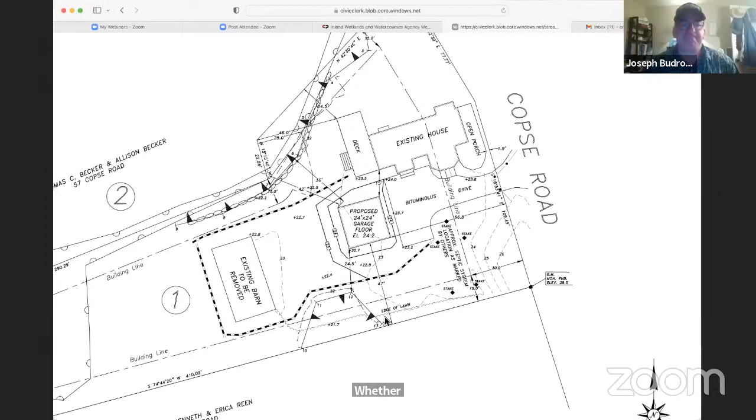That's right. Okay. And the silt fence is shown, as you see, and that would serve, my understanding, Kieran, as the limit of disturbance. You're not anticipating a lot of material stockpiling. The existing barn, Anderson Brothers are doing the demolition. They will have that gone within 7 to 8 hours. It's all gonna be removed in dumpsters, gone. And we're gonna bring 10 to 12 cubic yards of topsoil just to replace where the barn is and make it grass.

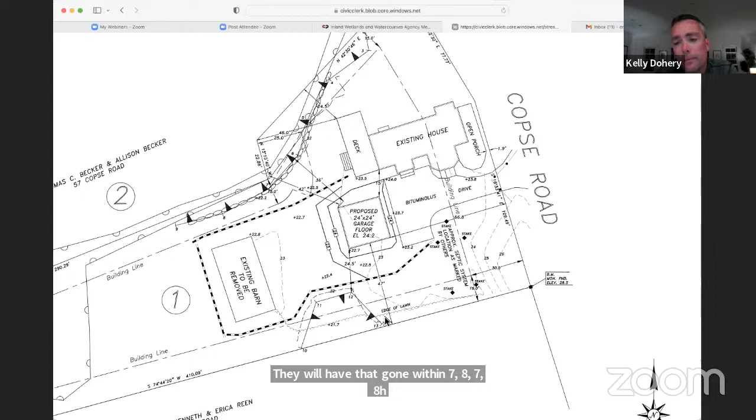Are there any other questions from the commission? I just want to say that I didn't make the site walk, but I did do a drive-by of this property, and I did take a really good look at the aerial view, and it looks like the wetlands are fairly well disturbed as a result of 100 years of past residential development. And there are two houses that are right adjacent to this property too. I'm not seeing any real significant value associated with these wetlands on these residential properties. And it looks pretty straightforward to me. I think it's a nice plan. Thank you. Thank you, Barton.

We did see a woodchuck when we arrived that day. Oh, there are the woodchucks. We love the woodchucks. So we had a tiny little shed that we took down, and he left that, and then he's put himself into the barn. So I'm sad, but hopefully he'll find maybe the new garage. He can find a little spot and he'll make his way to your garage. Yeah. He's gonna be inside our home. Yeah, or he'll be in our basement probably.

So, any other questions or comments, gang? Yeah, just really quick. I just want to reconfirm, and I apologize if I missed this earlier. The existing barn is larger than the proposed garage, right? Significantly, yes. Okay. The existing barn's about 1,300 square feet. The proposed garage is 576 square feet. Okay. So we'll be recouping that lawn area. More grass for me to have to mow.

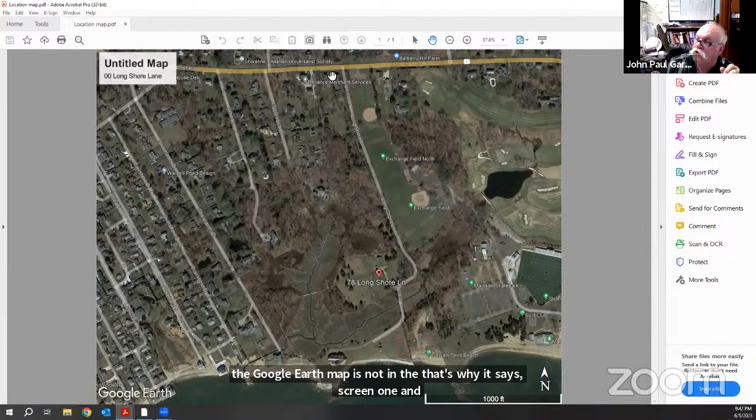Anyways, the property is south of Route 1. This is the beach club, and our property is in here. 78 Longshore Lane is an in-holding owned by somebody else. This property was the subject of numerous applications for a 6-lot subdivision in the past couple of years. What we're talking about right now is my client owns, she bought the 22 acres, and with the exception of this in-holding, follow my hand, that goes like this,

is 78 Longshore Lane. As you can see right here next to this barn, somebody dug out an area, and now we can no longer get across that area to get access to the back of the property. They own this piece in here, and there's no other access to this property. You can't get access from Shorelands.

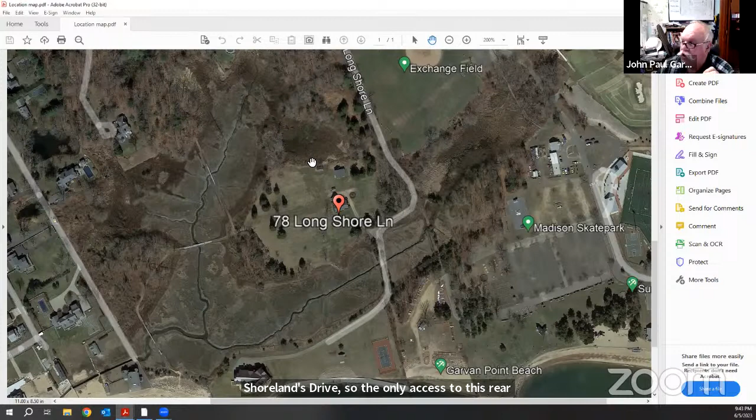There's no legal access to this property from Shorelands Drive. So the only access to this rear portion of the property is across a strip right here that butts up against the little wetland, which is all through here. Now, 3 or 4 years ago, it would have been a simple matter of just clearing out some brush, and she could have drove right across this.

In the interim, somebody came in here and excavated this out. And now we have a problem, and we want to fill it back in and create a 10-foot wide wood chip path that allows her to get mowers and gator type equipment back there, so she can keep up with this area here. And that's basically it.

And the site is all staked out. I mean, if somebody wanted to go do a site walk, this barn is very evident. And this barn is very evident, and this property line is staked all the way down, so that there's no way you can actually miss it.

What's the purpose of getting back there? To maintain this piece of property, you know, trees mowed, clean up the mess. This is all up in the area. Who's actually mowing it now? No one, because she can't get access to it. This is an older photograph, but the property line is approximately here.

It looks like the whole property is accessed through here. The only way to get there is here. You can't get on the east because this is all tidal swamp. You have no access from Shorelands. So this is our only access. And that's just tight, you know, it's right on top of the property line.

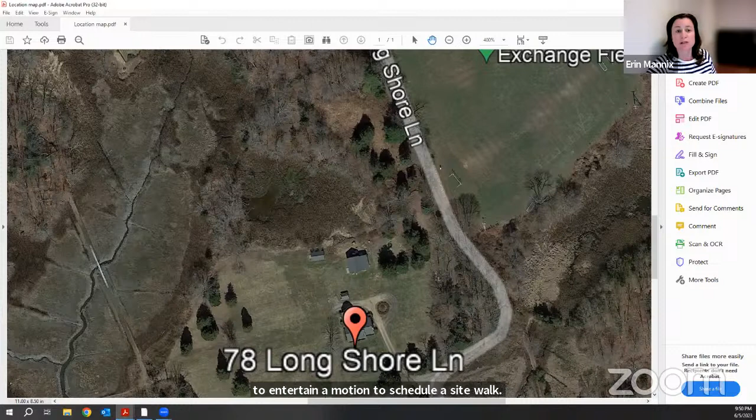Now, since the meeting date's already picked, you're asking me to entertain a motion to schedule a site walk? Yeah, I think if the agency is in agreement that you want a site walk, motion to schedule one. And we'll announce that if it's on our regular meeting date of 6/17, we'll just post the agenda accordingly. If that date isn't going to work, then we'll cancel that meeting or reschedule to a special meeting. Okay. And notice that properly.

So I'd like to make a motion that the agency schedules a site walk for Longshore Lane, the topic property for application 23-39, tentatively scheduled for the already selected date of June 17th, or a date to be determined by Erin based on the wetland agency litmus test for availability. Do I have a second? Second. Thanks, Lee. All in favor? Aye. 1, 2, 3. Okay, 4-0, Erin. We're doing a site walk. And we'll add this for discussion at your next meeting on July 10th as well, so you could further determine if you deem that a significant activity.

Correct. Thank you very, very much. We really appreciate it. Have a pleasant evening. Thanks for your patience and for staying on the line for so long, John Paul. It is what it is. I know, it's the job. Thanks, John Paul. Thank you very much. Have a pleasant evening. You too, thanks.

And now, item number 9, application 23-40, 8 West Wharf Road, the Madison Country Club, looking to put an irrigation system in the golf course. What else you got, Erin? So the golf course came before you some time ago, 2017, I believe, for regulated activity for irrigation pond maintenance, dredging. And they are now proposing to replace all of the existing irrigation lines within the golf course. I have met with their designer and a representative for the club. We worked to move these lines as far away from the wetlands, both tidal and inland, as possible.

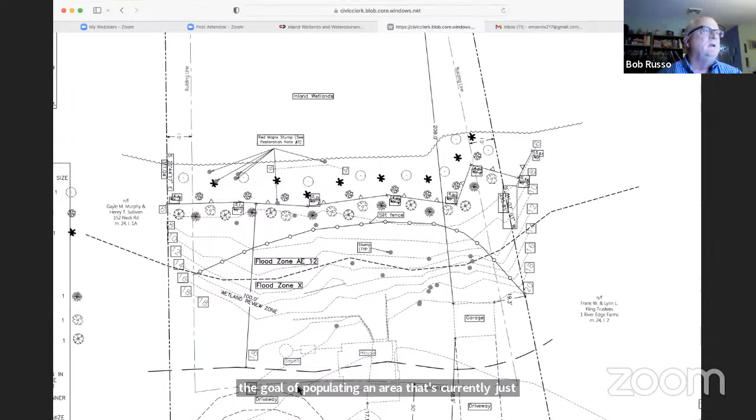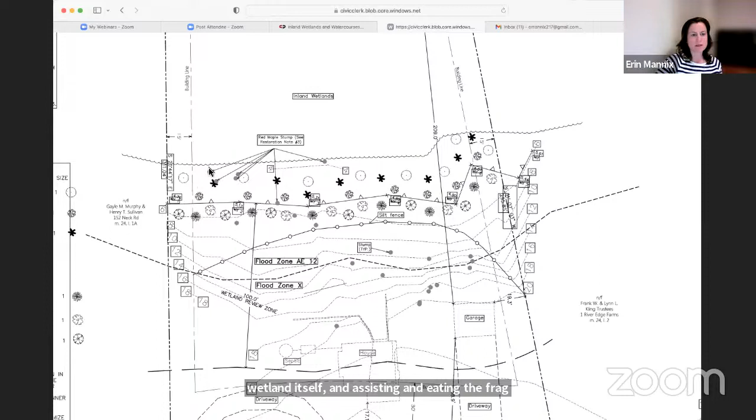You can see these are noted of the maples, and these are the ones that are... Those are the most recently cut ones. Yeah. There are some other stumps out there that are sprouting red maple as well. Right, there are some in the upland here. Hmm. I don't think all of these are. All of those are stumps. I don't know if they're all red maples. No, they're not. Yeah, I think likely probably just these closest.

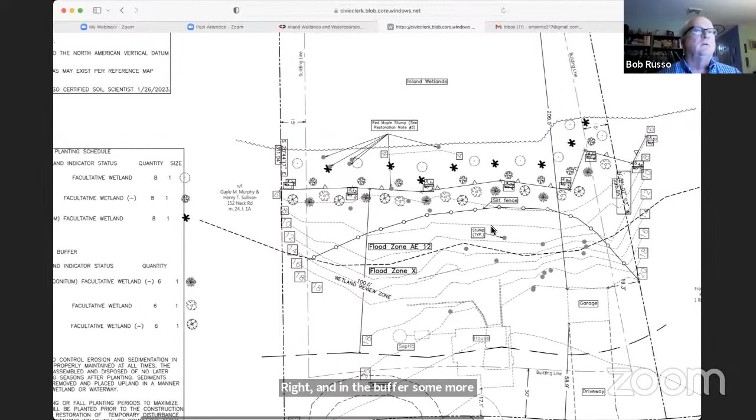And these, within the wetland, we're calling out the viburnum and the winterberry holly and the highbush blueberry. Right. And in the buffer, some more viburnum, some spicebush, and some witch hazel. Right, and the Phragmites removal program does talk about overseeding with a wetland mix. Right. With the wetland seed mix. It's a good measure. The idea is to beat back the Phragmites and give other vegetation a chance to grow in there.

I'm going to ask this question, Bob. I've never heard the term before tonight, and it was used twice. What is windthrow? So it happens especially to trees that are growing in wetlands, particularly where there are organic soils, where you just have a windstorm, and because their roots are so shallow, they're prone to being blown over by the wind. Okay, that makes sense if I break it down. I thought it was one word.

Okay. And that includes just the uprooted base, right? Right. So a portion of that remains rooted. Okay. Mm-hmm. Yeah, typically half of the tree roots are up in the air and the other half are still sticking down into the ground.

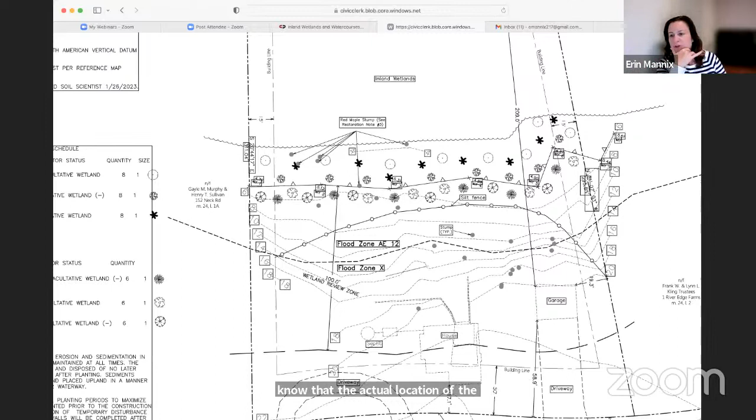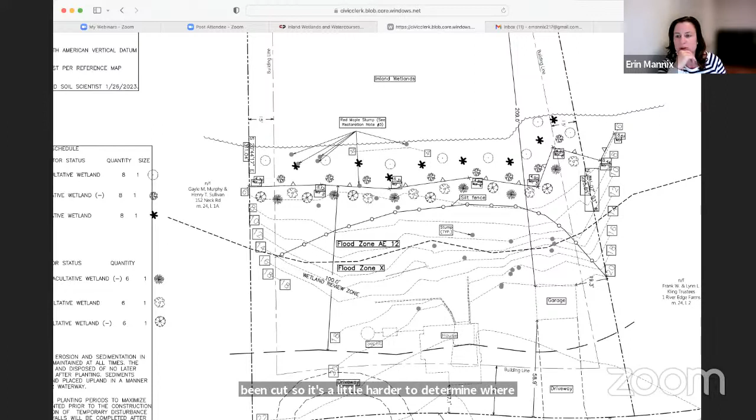So our condition, the directive says in the area of the clearing. So it didn't specify within the wetland or the upland, just in the area of clearing. So maybe some further clarification from the agency as far as where you prefer to see the trees. I know that the actual location of the shrubs be field determined by you, Bob, I think. Yes. Out there, and this doesn't show existing trees that have not been cut. So it's a little harder for us to determine where those open areas are. That's correct.

For instance, as you're looking at this drawing, on the left-hand side of the property, near where it says now or formerly Gayle M.

Murphy, in that area of the wetland and the upland, there are still a number of mature trees existing, shrubs in that area. And that's one reason why it's important to go out and pick the spots carefully. You want to put the trees in areas, especially where they get plenty of sunlight and can grow. And then some of the shrubs are more shade tolerant, some are less so. So it's important to be selective about where they go.

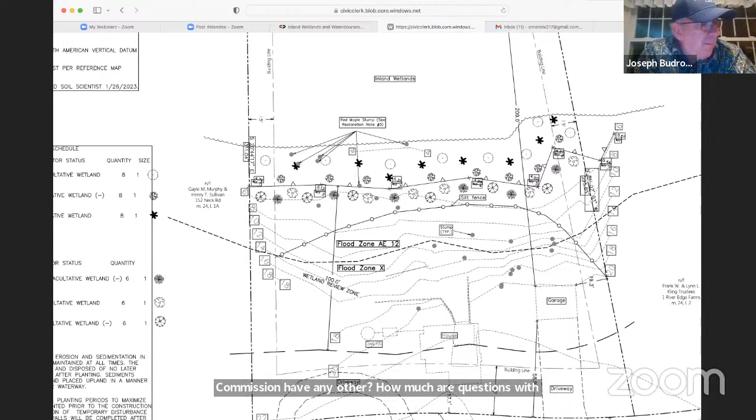Does the commission have any other comments or questions with the modification? Nope. I'd like to thank Bob for the well thought out and descriptive plan. Is there feedback? Yeah, as far as what the agency is thinking, we heard from Martin, but as far as size of trees or replacing with a smaller tree or eliminating that, the request is to eliminate the plantings altogether and just allow the resprouted trees. So I guess we need a little direction on that.

Yeah, was it Kia who was very anti-plantings, or was it across the board? There were others. Erin, did you mean the option was not to do even the shrubs that Bob proposed, or you're talking just the maple? No, that's not a request. The shrubs are remaining. The request from the applicant or the property owners is specifically to eliminate the 8 15-foot tall shade trees. Correct. And to utilize the Phragmites removal program in its place, basically. And I suggest that we modify from 15-foot trees to 6 to 8-foot trees to be planted on the wetland upland boundary.